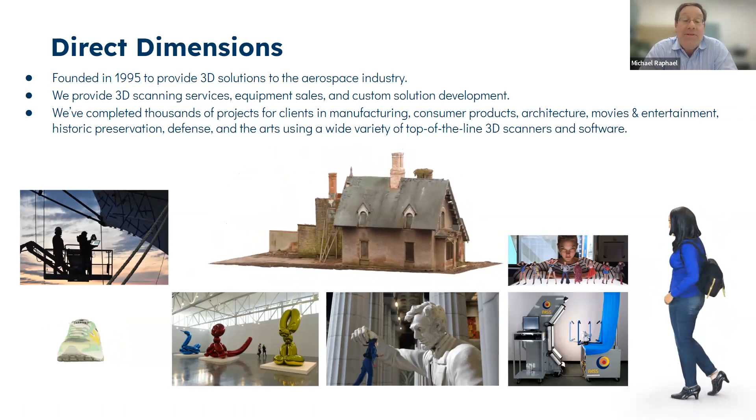As the photos and images rolling around show, we scan across a wide range of applications, from manufacturing and consumer products, to buildings, aircraft, ships and subs. We scan people, we do medical applications, and we push this technology to its limits in as many ways as we can. So if anybody, today or later, has any questions about scanning, I welcome you to reach out, and we're here to help with any understanding one would need.

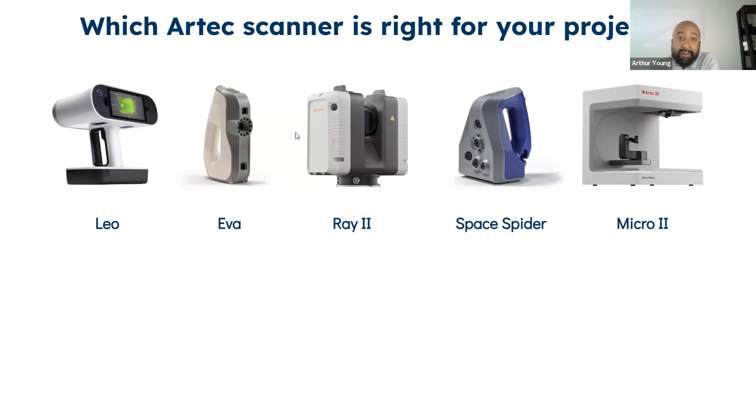So we'd like to just start, I mean most of you are familiar with, or you might have one of these scanners already, but let's talk about where this technology is. It's fantastic that you're using one of these scanners for scanning people, buildings, art objects, and it all feeds into the same pipeline, which means you can process the same data in Artec Studio 18 and moving forward. That's amazing with this technology.

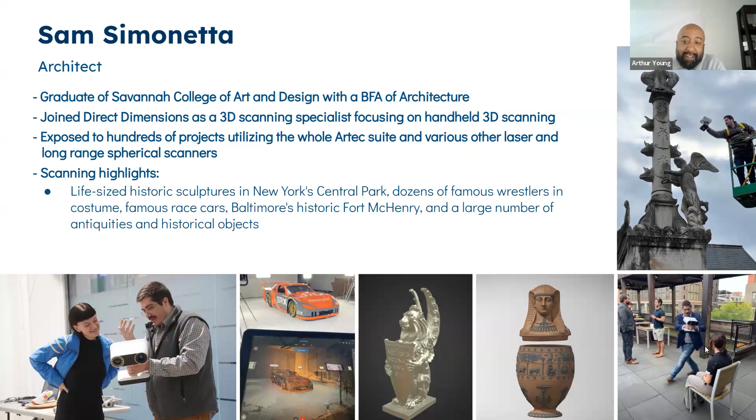We'd like to kick it off with an introduction to Sam, who's been scanning with the technology for quite some time. I don't think there's anywhere Sam hasn't been to scan objects, people, cars, you name it. So he's been using this technology in a wide range of different situations. If I ever have questions, I go to Sam, and 99% of the time he's got an answer. We're here as a resource for you, you can always reach out to Sam and myself to help with any Artec specific questions you may have. So Sam, I'm going to kick it over to you.

And these are some of the things that you can start to present on. So I'm going to stop sharing. Guys, I'm Sam, I'm going to be talking about mainly the user interface stuff that's new in Artec Studio 18, and Arthur's going to hit some other features.

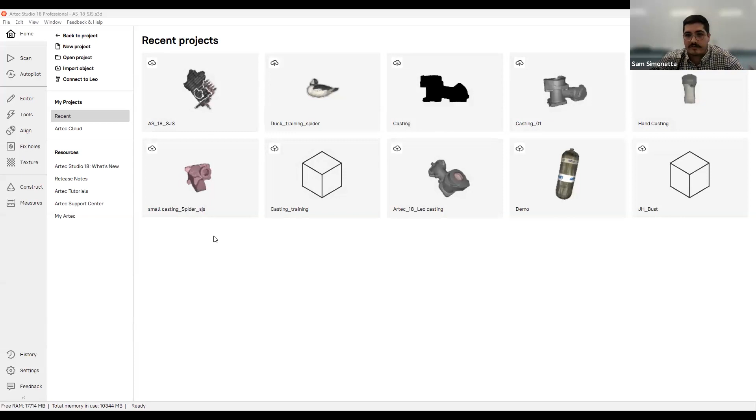So the first thing they changed in Artec Studio, right off the bat, is when you open Artec Studio it gives you this homepage, and if you look, it's a little different. The main thing is you can view recent projects based on images. So every time you save an Artec Studio 18 project, it gives you a screenshot of what's in that project, and that is displayed here. Depending on how you want to view this, you can view it by date modified, alphabetical, etc., or you can also view it in this view or by list, whatever your preference is.

The other cool thing in this homepage is you also have resources. So if you need to see the manual, or you want to see release notes, tutorials, etc., you can access all that in this resources tab, and it will directly link you to the website. Going forward, if you have a project open like I do, you can click back to project and it opens your project. If you ever need to go back to that home screen, you can click home and it'll bring you back to this page. So now you can toggle between both.

So in this case, I'm going to open my project that I already have done here. And I want to talk to you about some new features that are implemented in Artec Studio 18.

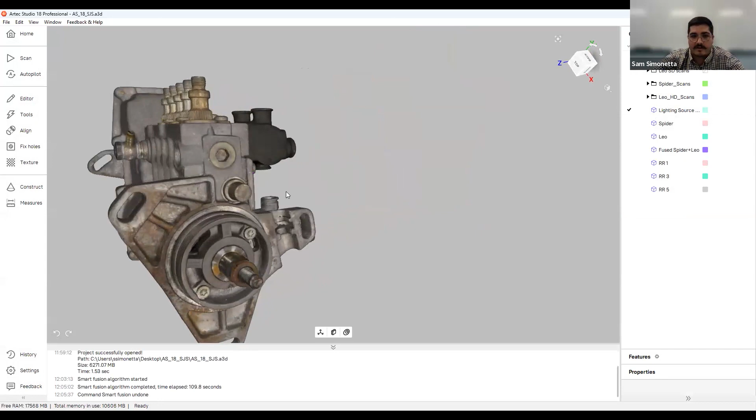One of the cool new ones is this lighting source control. I already have a finished model here, and you can see it's textured, has all this great color information, and I can actually turn on my lighting control. If I go down to this little box here and click lighting, I can show the directional lighting, and change this based on how I want to screenshot this. If I want to show people some realistic renders, something quick and easy without going through another software, I can adjust all these different conditions.

And it doesn't just apply to the colored model. So if I turn off texture and I turn on scan color, you can see now I can also adjust it in this view as well. So that's one of the cool things.

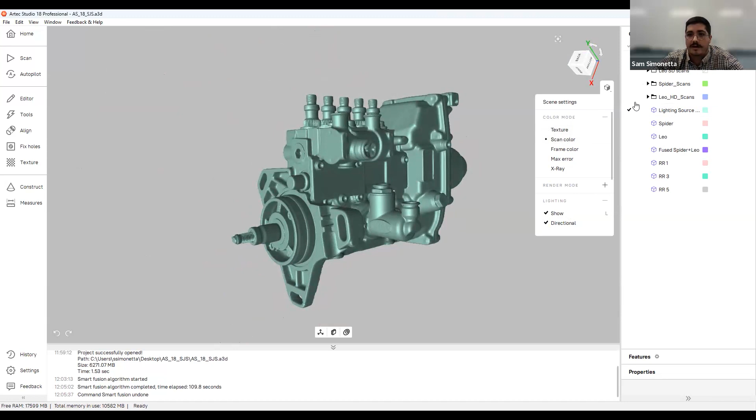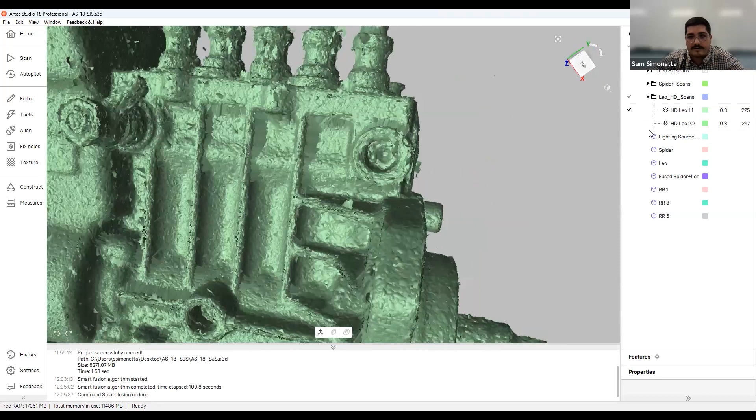Another really interesting feature that I use quite often now that I've been playing with Artec Studio 18 is this ability to select individual frames from a plethora of scans. So I have this scan open, it has 225 frames. In the past, if you had a misalignment or a frame that just didn't belong in there, you had to manually go in and search for it in the frame tab by going through individual frames. Whereas now, if you press Alt and click that individual frame, it isolates it, and then you can edit it, delete it, etc. And it gives you the number.

So if the misalignment or the thing you're looking for is in multiple different scans, you know the number and can gauge which one it is. So there's that. And this also applies in the eraser tab as well.

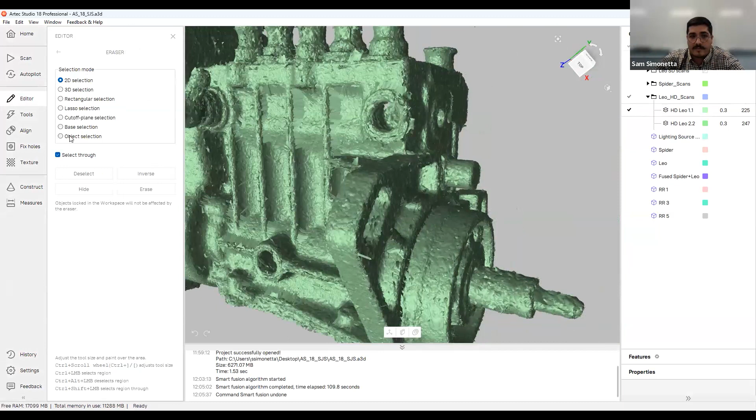So if you go to the eraser tab in the editor tab and do the same thing, the only difference is in the object selection mode in the eraser tab, instead of treating the frames as frames, it treats them as objects. So if I have my object selection on, I can easily just highlight that, and it highlights all the rest of the frame data within that frame. Whereas before you had to go in and manually do it.

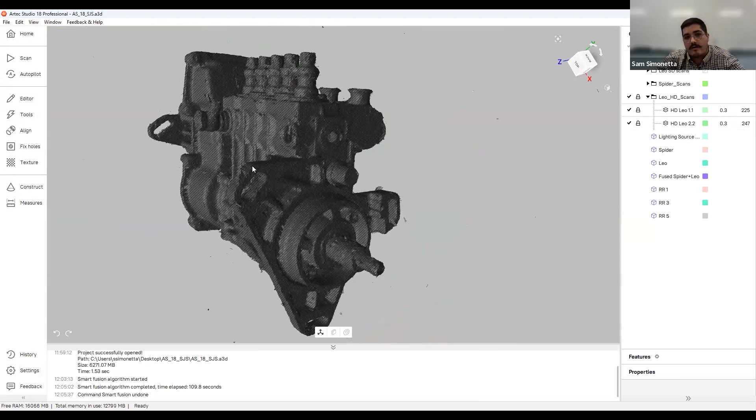One additional feature I'd like to talk about is the locking. In the past, you could lock frames, data sets, and objects, and it would be kind of hard to gauge what is locked and what isn't, especially if you had a lot of things within the project and different locked folders. So now when you lock something, it turns this really cool gray stripe pattern, which you can kind of visualize.

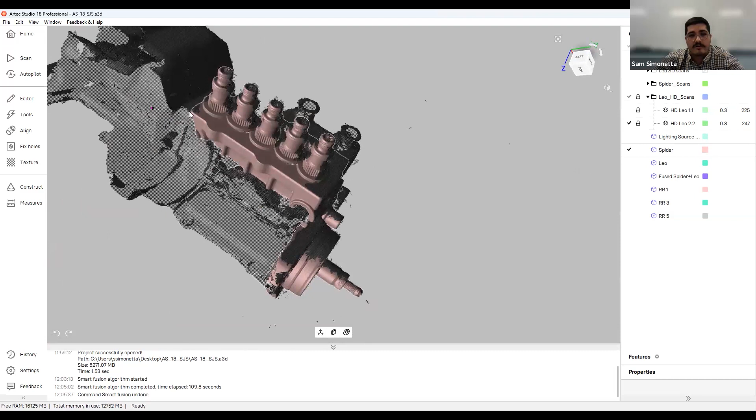So if I turn on anything else, you can notice that whatever is locked is gray and everything else is the scan color presented in the little boxes over here, which is quite useful. And this actually makes it immune to the eraser tab. So if I go back to the eraser tab and click anything I want to erase in this mesh, it will only erase what's highlighted and not what's locked. So if I erase that, it doesn't erase all the other selection, which is quite useful.

One other thing that's kind of interesting in the UI is the ability to do frame decimation. So say I'm scanning with the Leo or the Spider, and I might be new to scanning or I might be advanced, I might have over-captured something, or I have a huge part and want to reduce the file size. What Artec has introduced is this frame decimation, and basically that allows you to reduce the number of redundant frames.

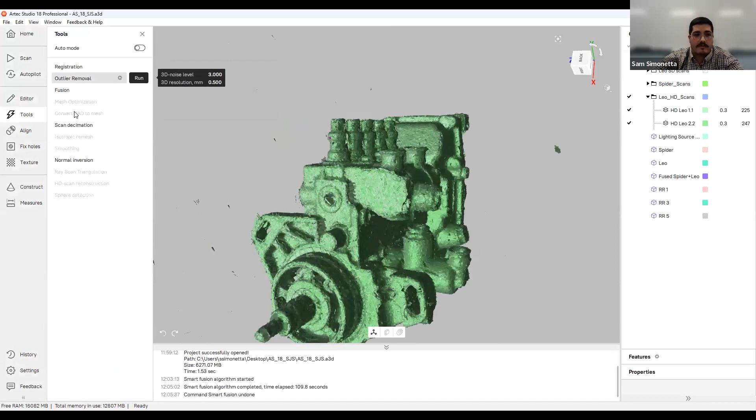So in the tools tab, there's a button that says scan decimation, and you can basically give it a decimation percentage. They say start at 40% is ideal, and then you can go down from there. What that's going to do is go through all those frames, all 200 or 500 frames here, and reduce those to 40% based on how much overlap is presented in the actual model. So this reduces the file size, and it just makes it easier for processing because there's no redundant frames.

And then since we're over here, the registration tab - you can see that things have been kind of pushed together here. So before, you had all these different things, but now it's all in one little menu.

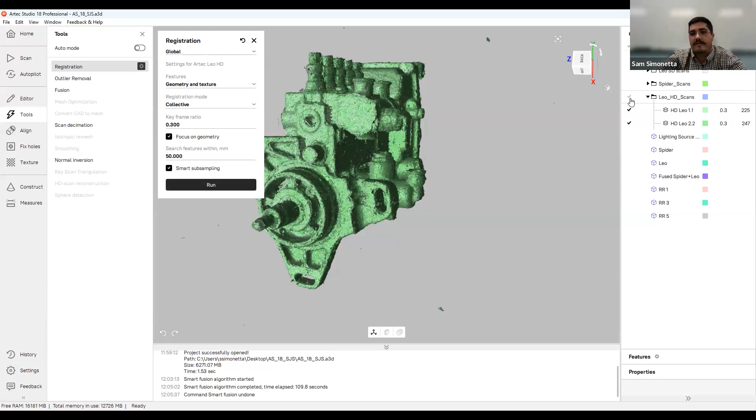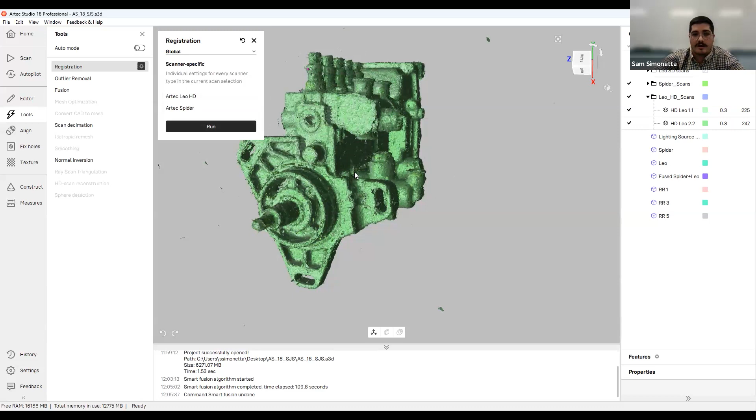Now you actually have the ability to do the registration with different scanners. So instead of doing them all individually and hoping they go back together, or running the registration multiple times, you can turn on the Spider and the Leo scans, and it gives you scanner-specific individual settings for every scanner based on the current scan selection, and you can change these settings for each one. So I could say these are my Leo settings, and these are my Spider settings, and I can run them simultaneously instead of doing it twice or three times. That just reduces time, etc.

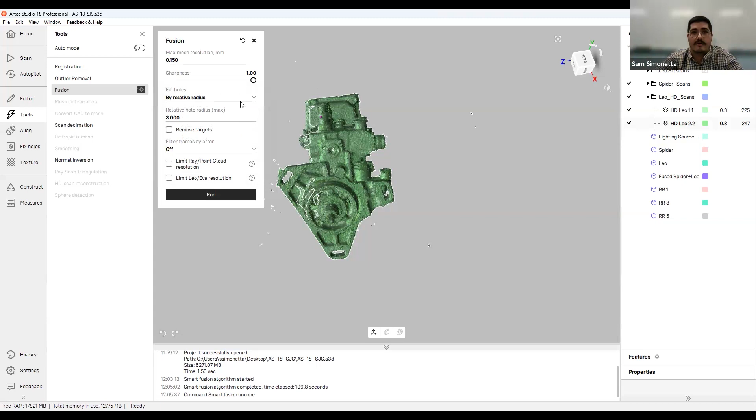And they also introduced this new hole filling method. So if you have 2 different types of scanners, like Spider and Leo, or Spider Eva, Leo Eva, Leo Spider, you can turn on 'by relative radius.' What that's going to do is take both sets of scan data, and because each one is being meshed at a different resolution, the hole filling is slightly different. So at 0.15, the triangle sizes might be smaller versus at 0.35 or 0.5, which is larger. This runs an algorithm where it merges those two together, so it knows the types of scanners and hole fills smartly and accordingly.

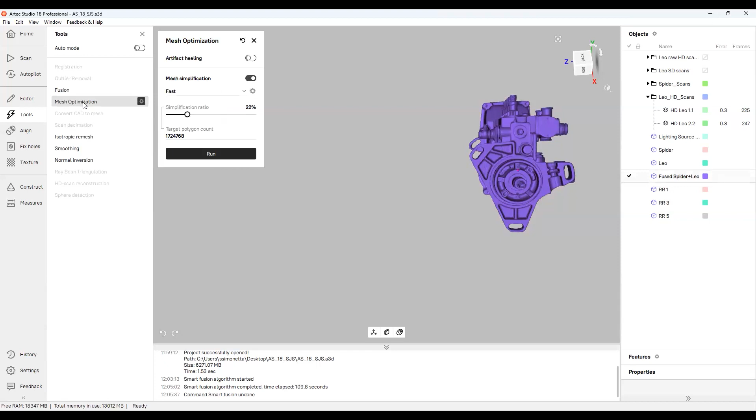So you can see that it optimizes the hole filling based on two different types of scanners. And then within this tab, let me turn off one of these - you have the mesh optimization tool, which is similar to the post-processing tools that used to be here, but now it's called mesh optimization. They introduced this Artec, or artifact, healing. If you click that, you have the ability to remove small objects like before, based on the object size or triangle size, whatever is easier for you.

And then the newest thing they introduced was this heal bad polygons. If you select that, you have the ability to verify and correct problematic polygons - non-manifold edges, dangling edges, crossing, folded, overhang, etc. And then you can also fix holes in here as well.

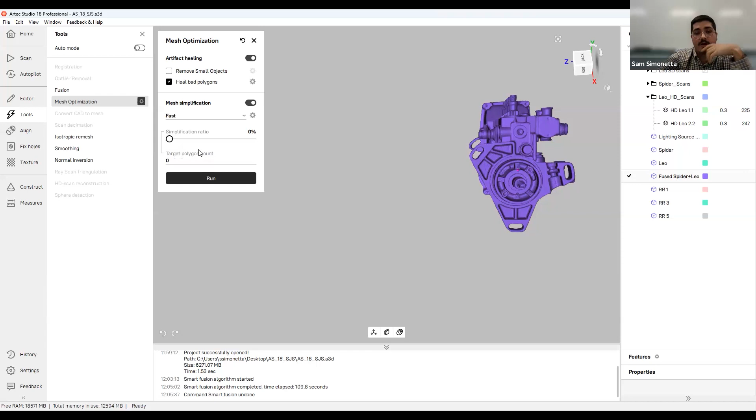On top of that, you have your mesh simplification, which is also in this folder. So if you're doing decimation to any level, you can do it either fast or regular, but they did introduce this slider - if you want to target a specific polygon count, you could type in 2 million, and it will adjust according to that, or you can use the slider.

In terms of exporting data, this is something that's a little different in Artec Studio 18. You can do it the traditional way by going File, Export, and whatever is selected can get exported. But now you also have the ability to right-click on the mesh and press Export, and then export it to Design X, Control X, etc., or just in general.

And while we're over here, if I click properties - let me move some things around so I can see it - properties of our objects will give me the basics: polygon size, the rough estimate of the file size of this export, the resolution, and the source scans and the scanners they came from.

So in this case, it came from two scans from two different scanners. If you highlight over here, you can see that it came out of the Spider and the Leo, and vice versa. There's two scans, Spider and Leo.

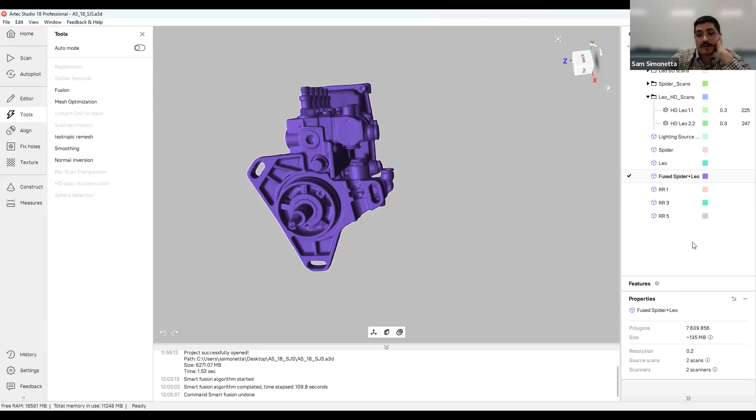So if this is for the mesh, and if I click on the actual scan itself, if I unclick this and click on the Spider scan, you can see I have a basic and an advanced tab. In the basic tab, you just get the global registration, the frames, how many frames there are, texture frames, max error, scanner, and scan date and time. In the advanced tab, it gives you a bit more information about tracking mode, factory calibration, and the scanner ID. Those are all very useful. If you forget you've done a specific step, you can always go back and verify based on what it says, like global registration's done, it had this amount of frames, etc.

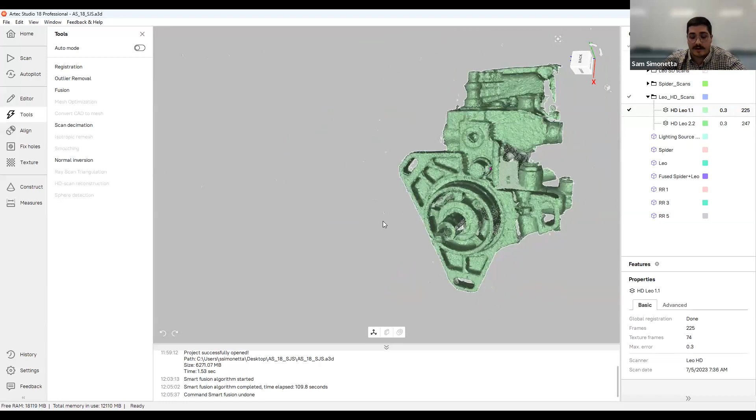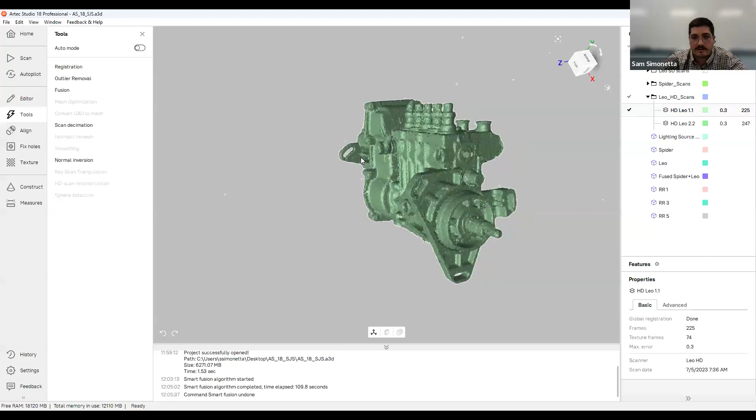So one of the last things I'm going to hit on is the HD reconstruction. In order to do HD reconstruction in Artec Studio 18, you have to run a neural network AI process. That will run in the background for a bit, and then it will optimize your computer to run the HD reconstruction if you're using the Leo. This is only for NVIDIA cards, and it's GPU based, so testing is mandatory.

And then the final thing I want to hit on is that with the introduction of the Ray 2, you can now import Ray 2 data. You can import that file by pressing import and then Ray 2 scans, just like you would import a Leo project or photos, etc. So that's all I have with the UI, and now it's off to Arthur.

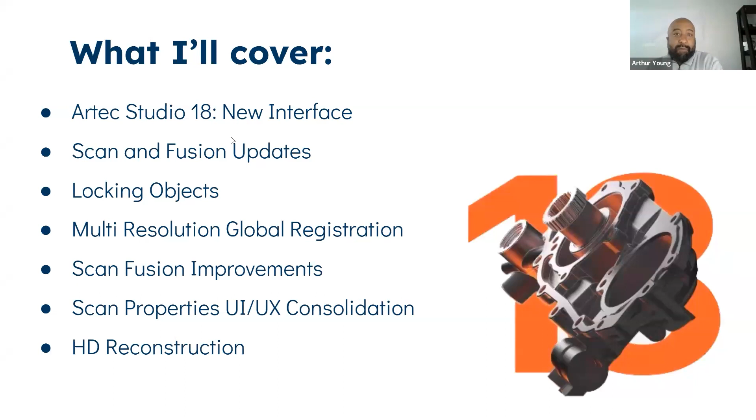So I'm going to cover another portion and give a quick update here. Sam just covered these different areas and options within the software. A little bit about Arthur is who I am - my background is industrial design, product design engineering, and this is just a quick snapshot of different projects that I've worked on. In many respects, we've used 3D scanning as part of the process.

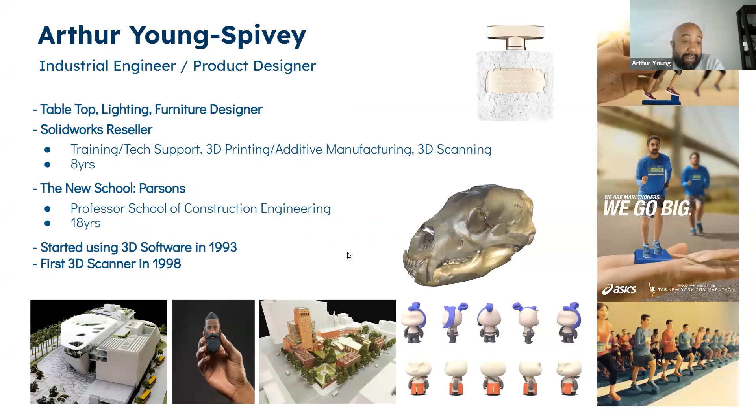So some of the areas I'll begin to cover, what's new inside of Artec Studio 18, have a lot to do with enhancements in areas, taking a look at some new toolbars that were added and things of this nature. So I'm going to actually pull up Artec Studio 18.

As Sam mentioned, we could see that the UI, the UX has now been changed. So all of the recent projects are now showing. I'm going to open up this project called 'all what new'.

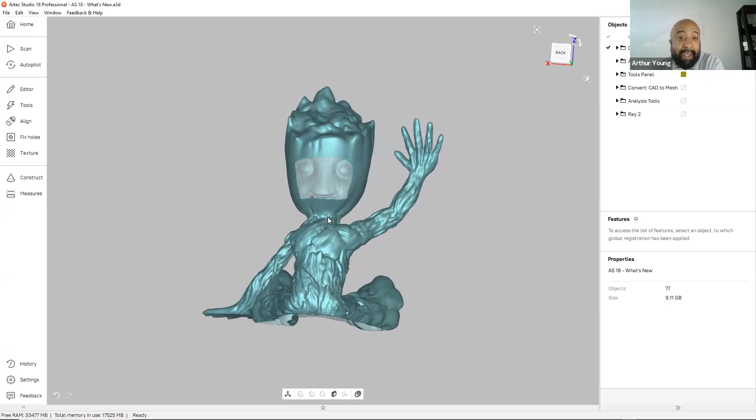One of the new aspects that have been added is within the defeature aspect. Most of you might be familiar with Groot from the Marvel superheroes movie set, and back here we just have this huge kind of hole sitting in the back, right? If you haven't tried the defeature brush, it's located here in the editor's toolbar amongst the transform, rotate, positioning, smooth, and eraser brush, but definitely the defeature brush is here.

So this is an algorithm that within the hole filling, we used to get this option. If I want to fill this hole, I could go ahead and use flat or smooth. So what they did is they basically carried over this algorithm of filling the hole smoothly, and carried this into the defeature brush essentially.

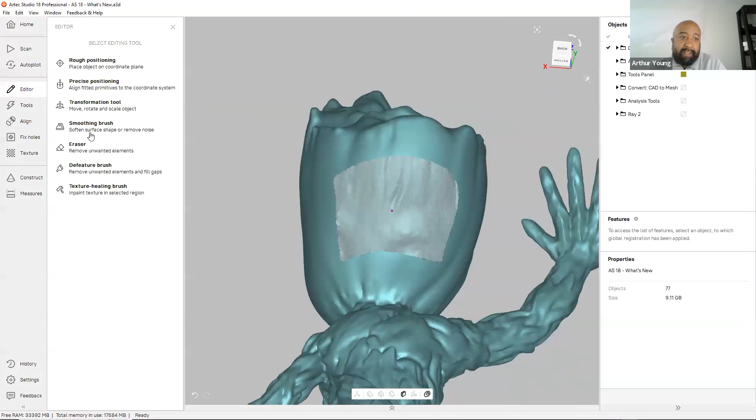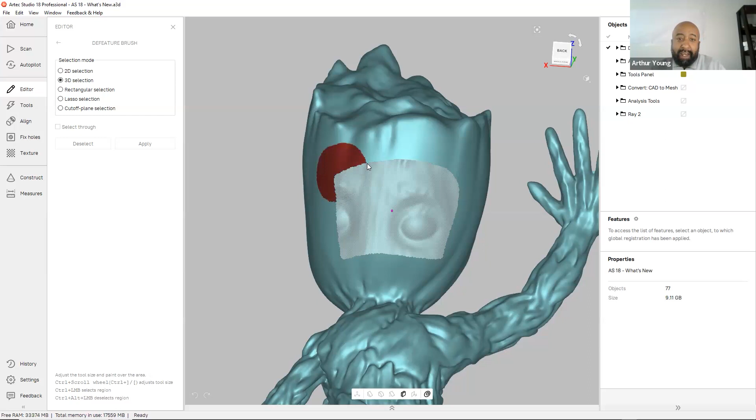So I'm going to turn off this option over here - maybe some of you might have noticed this, maybe not. It says 'select through'. When I do that, it allows that when I'm holding control on the keyboard and using the middle mouse wheel, the brush size is changing by holding that middle mouse wheel. I'm just going to highlight while holding control on the keyboard to basically grab that edge. Because I don't have select through turned on, it doesn't grab the other side of the face. Then when we click on apply, it's basically going to fill in this hole nice and neat.

Right, so that's a great addition to have that curvature continuity filled in for that hole algorithm in general. This is a new option that's been added specifically for the defeature brush.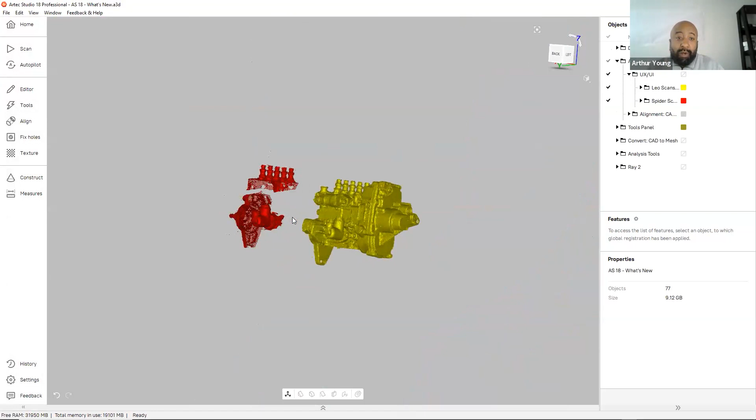Taking a look at the next step, alignment. For the UI and UX, one thing that's definitely changed is the colors on screen. When going into the Align tab, you can see the blue and red, yellow and red colors reflected as part of the individual scans, and the folders for those. But when we go to the Align tab, previously the two base colors were blue and green. Now, moving forward, the colors are gray and blue. So when it's registered, as we've known before, it could be that blue color.

You can double click, as most of you know, or right mouse button click to mark it unregistered. If we go now to the not registered scans, this used to be green in color, so they changed it to gray, but that's still free to move around. Nothing has changed in that aspect as a whole.

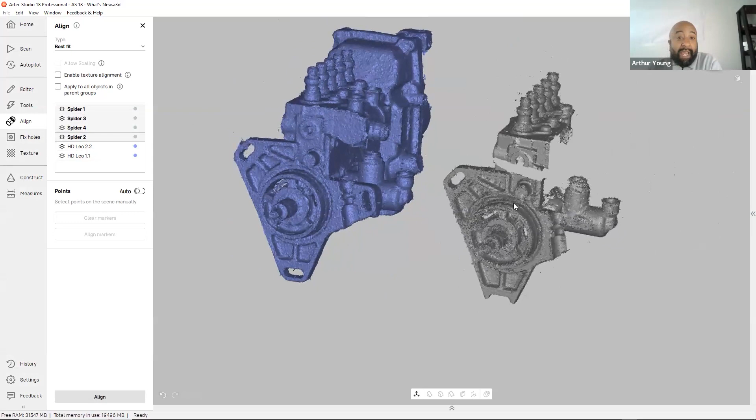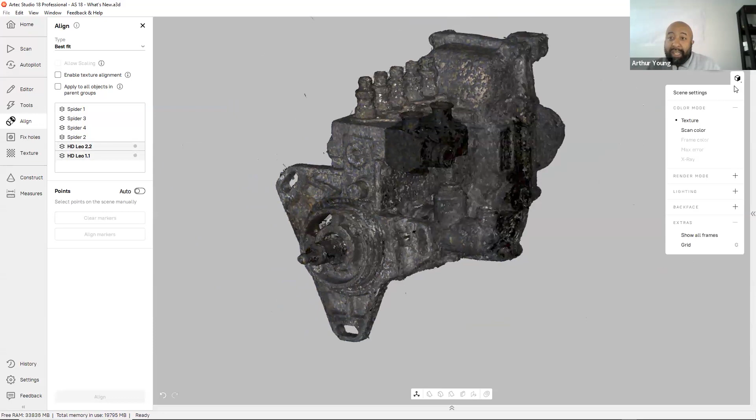They've also added the ability to show the scan and texture colors. So if you've scanned with your Spider, Eva, or Leo, and you have color or textures on the model, that can now be shown on the screen. If I double click, you can see the scan colors are now being shown, or you can drop this down and show the scan colors, not the textures. It's totally your choice. Again, that's just a UI enhancement, changing it from the green color previously to this gray color. Not a huge deal, but it's definitely helped for recognition of what's happening within the environment.

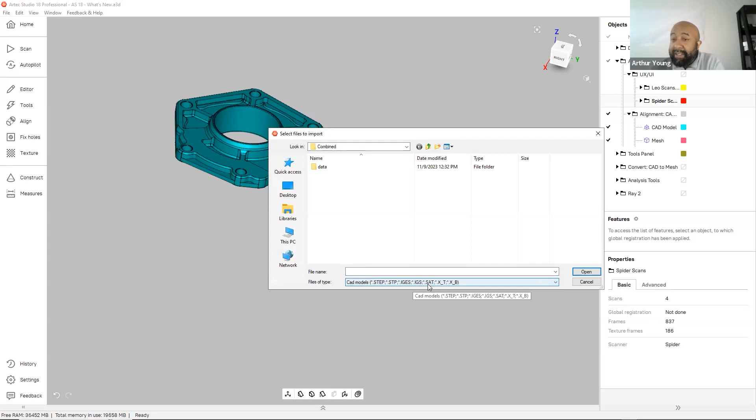But trying to align mesh data, which is what this data is right here, to CAD previously was not possible. So we can have the CAD model fixed, we have the mesh data, and we can just click on Align. One thing you'll notice is there used to be a green bar down at the bottom to show the progress, but now here in the middle there's an Align tab, and the progress bar grows as it begins to align the mesh. You could also do the method where you add points - either methodology works, whichever is easiest for you.

But once that data is aligned, mesh to CAD data is really a huge deal. This allows you to do a whole host of inspection analysis, deviation analysis, and cross-section analysis between the two data sets. So it's no longer that you have to convert the mesh to CAD or the CAD to a mesh and go from there. So there, the two geometries are aligned to each other.

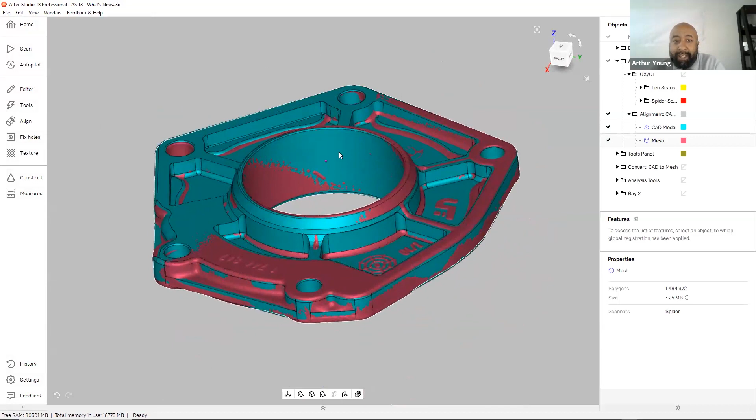Just a little tip - if you're rotating on the screen and it's rotating not on center, as Sam mentioned before, it's worth revisiting: double click and it gives that little sphere, which is the center point on the screen from which you're rotating. If you want to deselect that, just double click anywhere on the screen and that comes back.

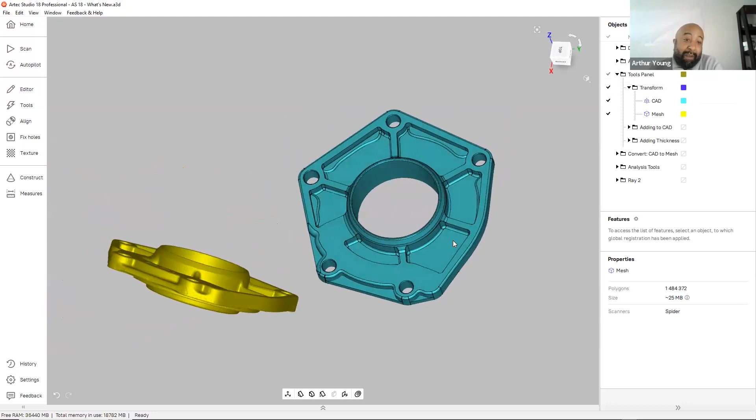Moving on to the next aspect added for Artec Studio 18, within the tools panel - this is a huge deal for me. Whereas we normally would have to go to the tools panel, under Editor, Tools, Transform, to get the move, rotate, and scale tools, now in Artec 18 we have this little panel down here which gives us the option to move, transform, and rotate. Now here's a little trick - the same way Sam showed earlier how you can lock an object, because if we do the rotate, move, or transform options, it's going to move both at the same time, and that's not what we're looking for.

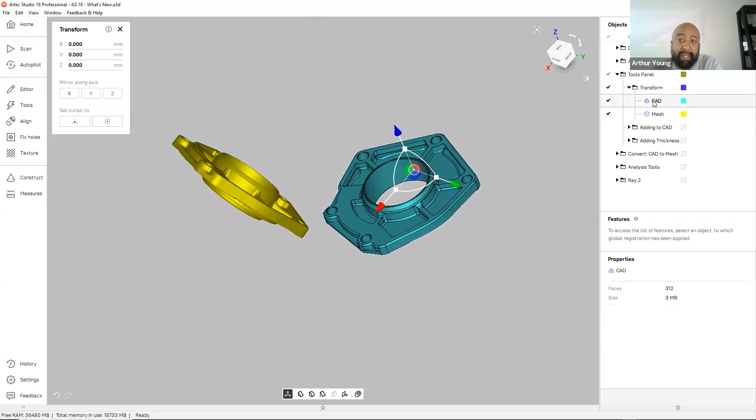So we could go to this object, the CAD, and say lock object. As Sam mentioned, it goes to this stripy gray kind of color here. So if we want to now move this, you'll see that it's only going to move just what's in yellow.

We can set the cursor to the geometric center, but it doesn't go to the center of the yellow because we're showing both data sets at the same time. So if I just quickly hide that and bring it back, you'll see that it now goes to the center of the yellow, and we can really try to get this in position and translate and rotate this around as we need it to be. That's a nice little update here in the tools pop-up menu at the bottom.

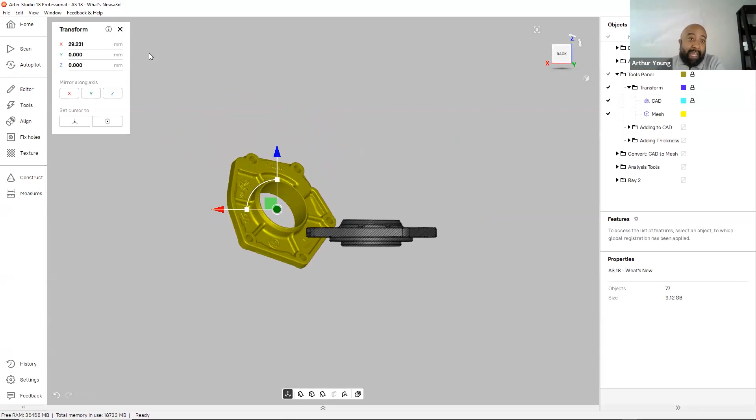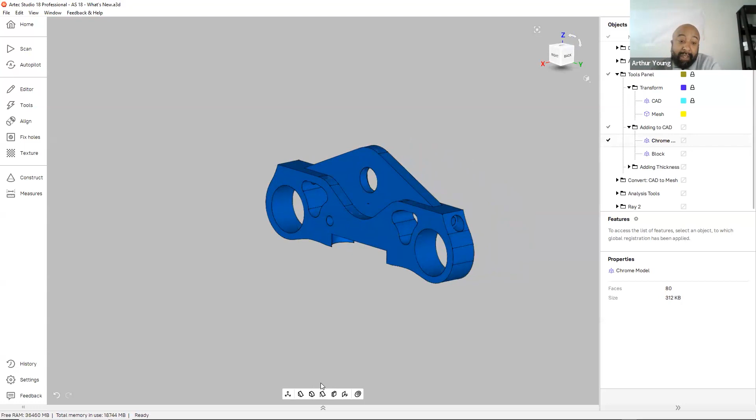Along with that, we have some other options for adding certain types of features to imported CAD data. We have chamfers, fillets, and draft angles as three options to add to a CAD file. So very easily we could say we want to add a distance chamfer that's symmetric.

We can pick this edge and it gives a highlight. If we need to change the actual value, there's a nice highlight showing this chamfer running along this tangent propagation. When modeling in CAD software, this arc is tangent to this line, tangent to this edge. So this tangent propagation allows it to either, if I turn that off, only go along this edge, or when you turn it on, it runs along the whole edge.

So when you apply, you can see that chamfered edge is applied to the geometry. Again, this is an imported CAD file as a step, IGES, or Parasolid file format.

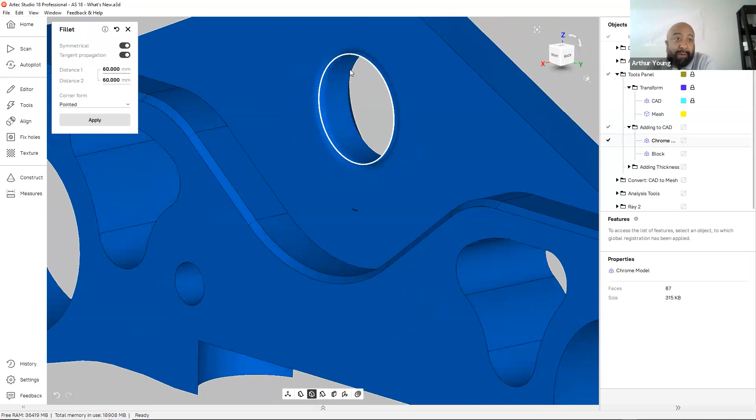Along with that, we also have the fillet. Being able to just grab an edge, and again seeing a preview of the values, we could make this 30, or 60, whatever value you'd like. And it's always giving you a nice little preview. Click apply, and that's onto the geometry.

So they're just adding more functionality within the software that allows you to add some things without having to export it back out to make these changes. If you don't like the change, there's this little undo, basically Control Z here in the box, and that will just take it back as if it didn't happen.

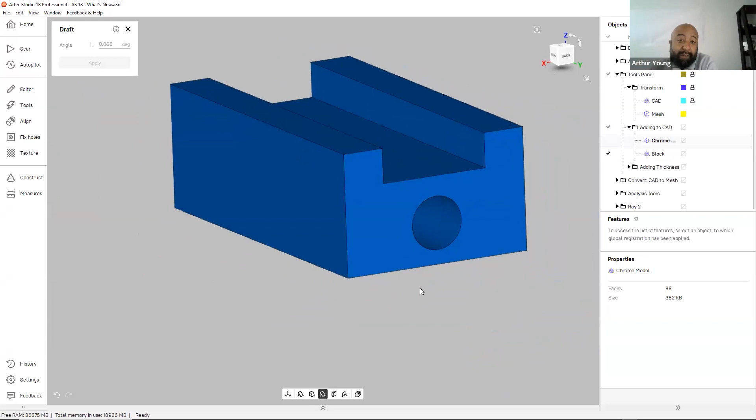Adding a draft. This is a pretty simple block, but just to communicate what we're trying to say: when you're adding a draft, like when using injection molding, your side walls can't be 90 degrees. They have to have some type of taper, some type of draft angle to them. The first face that is selected is your zero datum from which it's parting out and creating the angle.

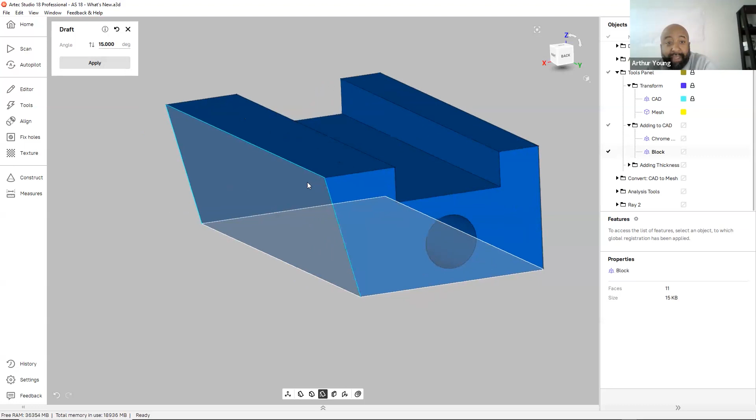So we could say this face is what we're adding to. Just to be dramatic, we're going to add a 15 degree draft. Normally it's maybe 3 degrees at most, but it's showing you a preview of that 15-degree angle from this side. So we can click apply, and the dialog box is still open.

So if you wanted to click on this face and then add a draft to this face, you can add a different draft value, and you can also put in a negative value. So if I say -20, it's going to go in the opposite direction. You can click apply, okay, and it applies that information.

Again, just allowing you to do some base CAD features and functionality here in the software is essentially what they've added into the software. So again, this is CAD features.

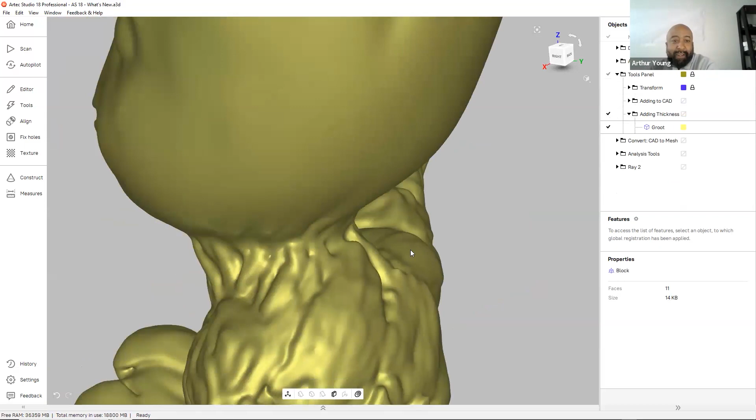Next option, adding thickness. I like to go back to this guy because he's one of my favorite characters in the movie. What we're thinking about is using this for 3D printing, specifically SLS 3D or any powder-based printing. One of the most important aspects of that is that this is just a hollow model, right? It has no wall thickness, but especially as you want to leave a uniform wall thickness to the model so that the powder can be excavated in post processing.

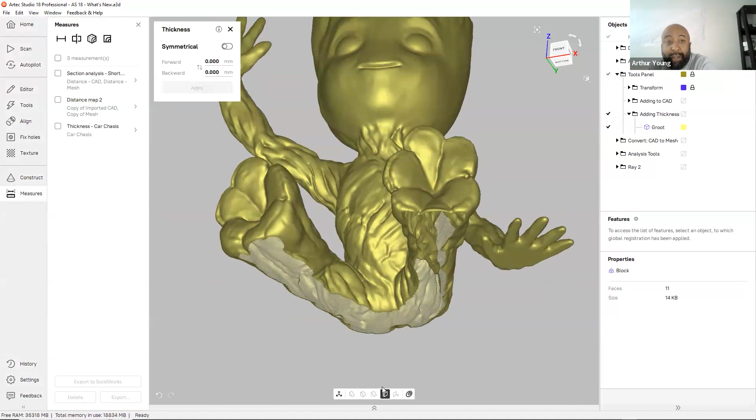So here under the construct the measures tab, or down here in the toolbar, we have a thickness option. If we click on that, it's asking us whether we want to add this wall thickness to the inside or outside of the geometry.

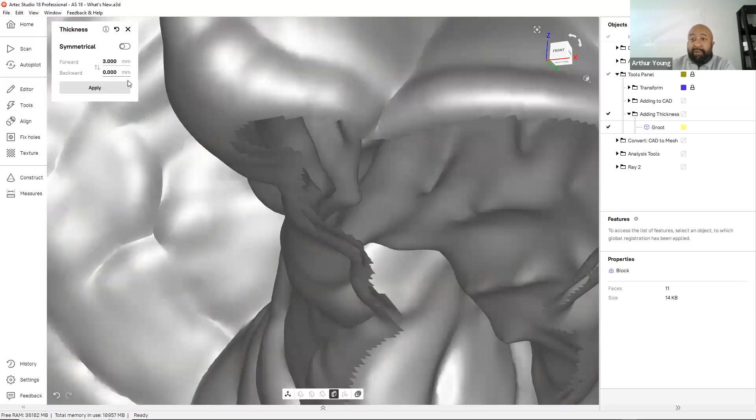So if we put in 3 millimeters, it gives you a preview, showing the geometry going inwards, or you can reverse it to go outwards. It's your choice depending on what you need. So we click on that, click apply, and now it's offsetting uniformly that 3 millimeters, and then it's going to cap it. So this is a watertight 100% model that's ready for 3D printing right here from the software.

If you wanted to really double check this, you can add a section view that's going right through the model. This is a nice addition in Artec Studio 18: even after you have a plane, it's dynamic, so you can slide all the way through the model. You can see it already has that uniform wall thickness all the way around, which is great especially if a lot of you are doing 3D printing.

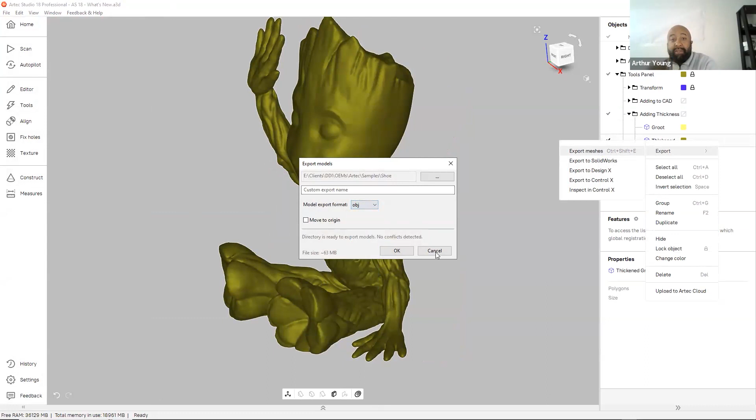So you can export this out as Sam showed earlier. You can export this mesh as an STL file, OBJ, or PLY, and that can go right to whatever type of 3D printing you're going to do from there. This is a nice addition that's been added, and when I added that thickness, it kept the original, so you could have multiple versions at different wall thicknesses if necessary.

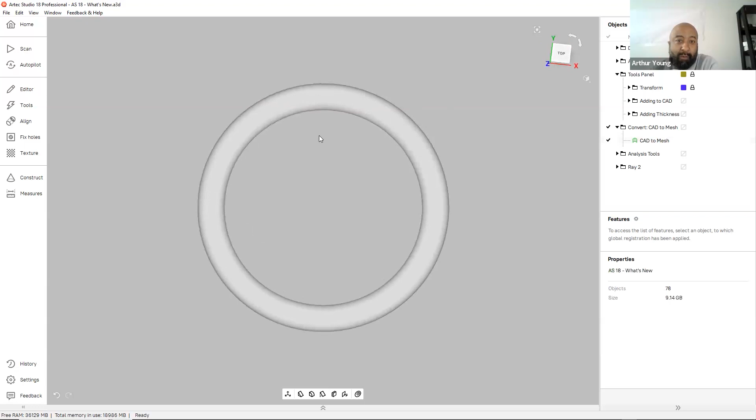All right, converting to CAD, or rather converting a CAD to a mesh. This is an interesting aspect where if you want to use the CAD geometry for Boolean operations inside of Artec Studio, we have this CAD file that's been imported. Part of the reason I wanted to show this in simplified form is because when you're using this algorithm, it's converting it back from a BREP CAD data to mesh, so triangles or quads.

The accuracy is really going to make a difference here. I'm going to turn this down to 10 so you can really see what we're looking at. When it converts from the CAD file to the mesh at 10, it's a really low resolution, and that's generally not going to be desirable. The accuracy setting determines how well the mesh is going to trace over this existing CAD geometry. So if we say an accuracy of 70, that's more than likely going to be enough to trace over that existing geometry.

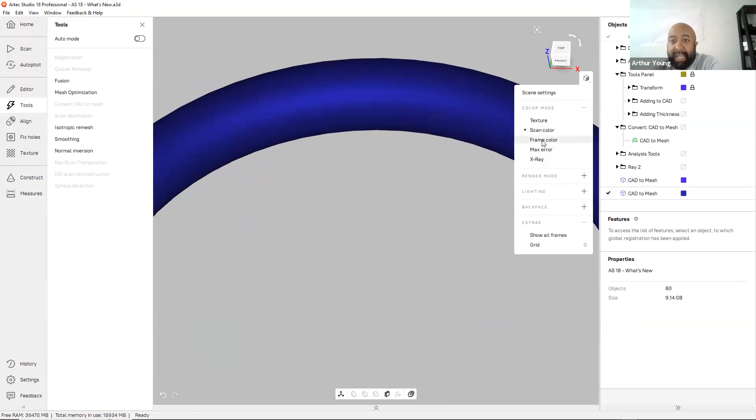You can also change the view from scan color to X-ray. X-ray was probably one of my favorites - if you haven't tried it, give it a try. You can bring up the brightness and kind of see through the object, so to speak. You can also switch it to wireframe, point cloud, wire over solid, or points over solid. So there are different ways you can render on screen while in X-ray mode, or even scan color.

And again, if we had another operation, we could come down here - if you guys haven't tried this, under the edit menu there's a Boolean operation. So you can add, union, subtract, or intersect any two mesh geometries inside of Artec Studio.

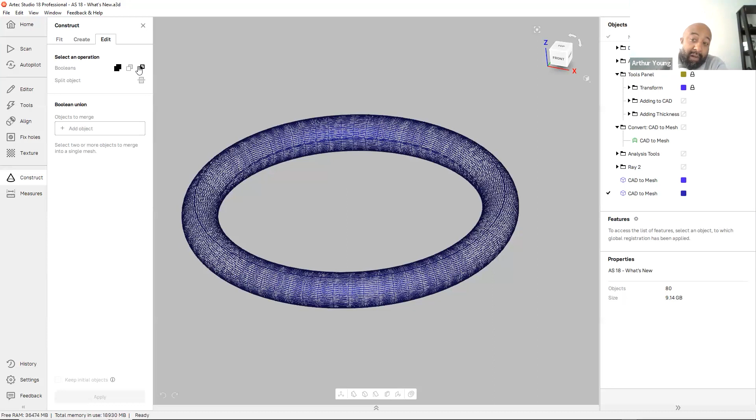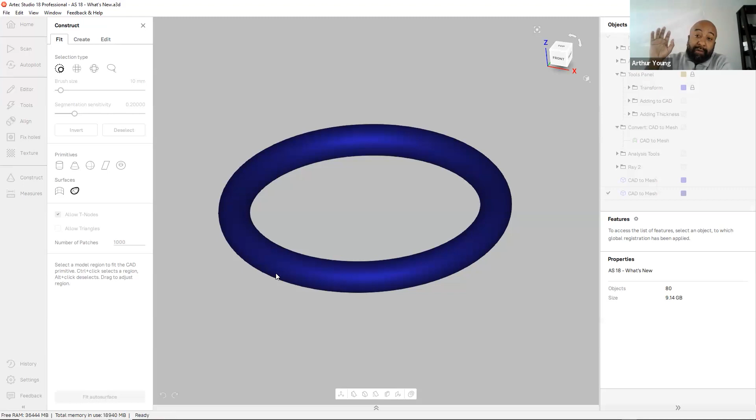Something some of you might have missed that was added in version 17 is the ability to take a mesh - if you need to go to CAD software, bringing a mesh into CAD software can definitely be challenging. So here you have this option called auto surfacing. We could try at 1,000 patches to trace over this geometry, and it will do that. When it's done, you can export out from Artec Studio as an actual CAD file. 1,000 is definitely not enough, but this just illustrates that from here, when we do the export, we can export this to our CAD software, or just export the model as a CAD object - a STEP, IGES, or Parasolid XT file format.

Okay, so that was just briefly viewing the fill feature brush, where I filled in that hole. We have the alignment aspect, where we'll be able to move things around, things change color from green to blue. We have some new tool panels down here in the UI.

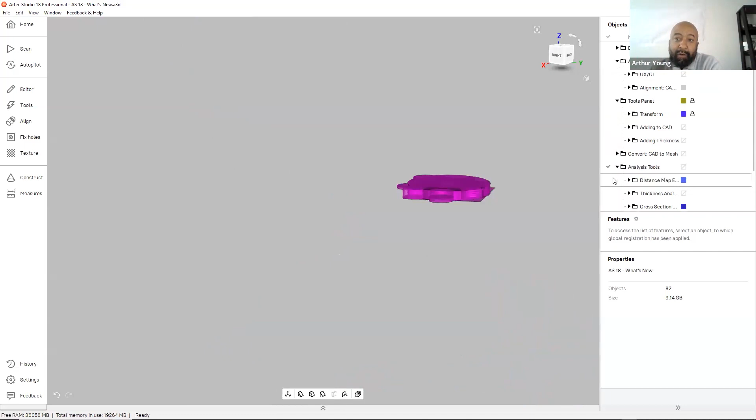And now getting into the analysis aspect here - first things first, distance analysis that we'll take a look at. So we have these two CAD objects that were overlaid on top of each other.

Under the measure tab, we have the option to do a distance map. This compares how much deviation there is between the CAD model that was first designed and the machined or 3D printed model, however it was actually manufactured. You can overlay the two data sets and calculate either by shortest distance or along normals. So from a distance map at 1 millimeter, you could see how well your process quality inspection is holding to your existing data. If you've made this one time or 10,000 times, you'd like to know that the 10,000th one is as good or close to the first one off the production line.

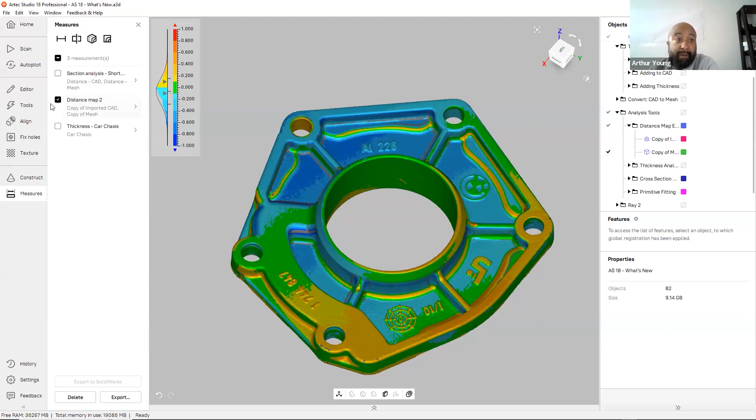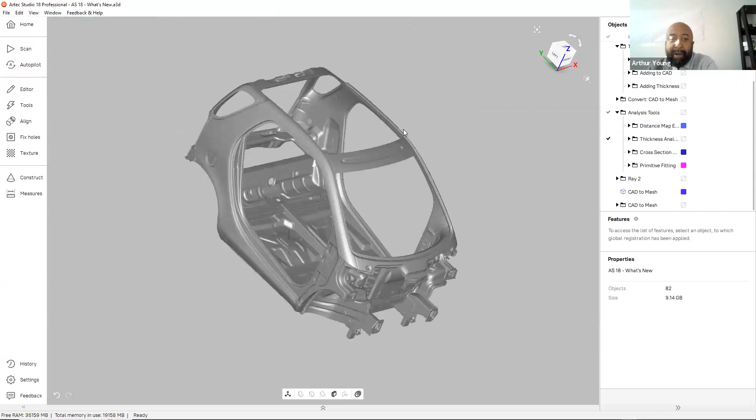Continuing with thickness analysis. This is mesh data, not a CAD file. If you're not sure, click the little box here and it fits it to screen. When doing a thickness analysis, still under the measure tool, we can do section analysis and distance map. That same distance map option is under thickness, where we can calculate and check for uniform wall thickness across the board. Click on 1 millimeter, then calculate, and it runs through the entire model, highlighting within the specification. We can also show min-max values called out on the model, looking at the range we've specified. You can bring the scale down to really examine the thickness of the geometry, and you can save this as a map.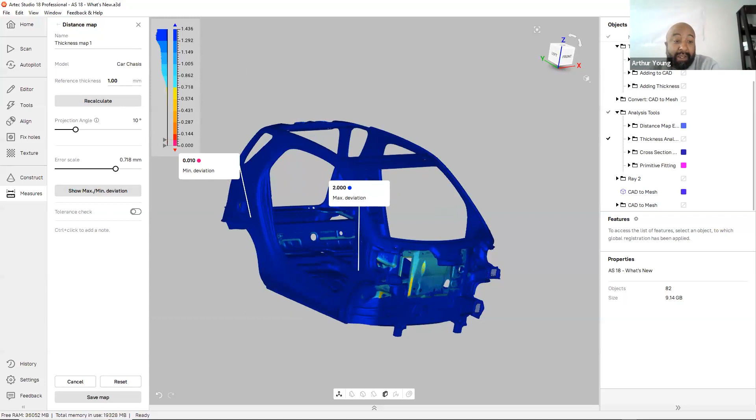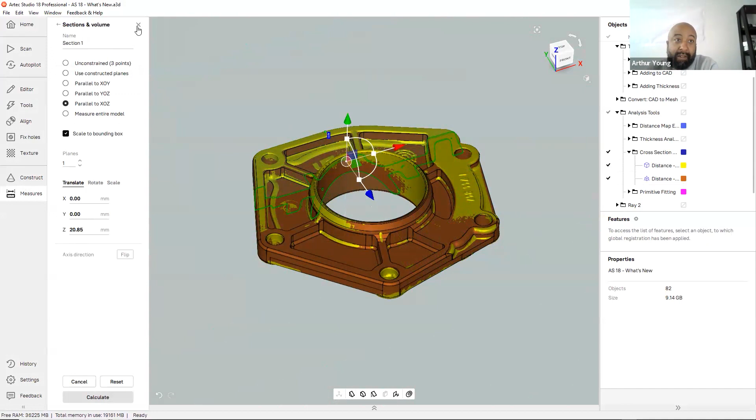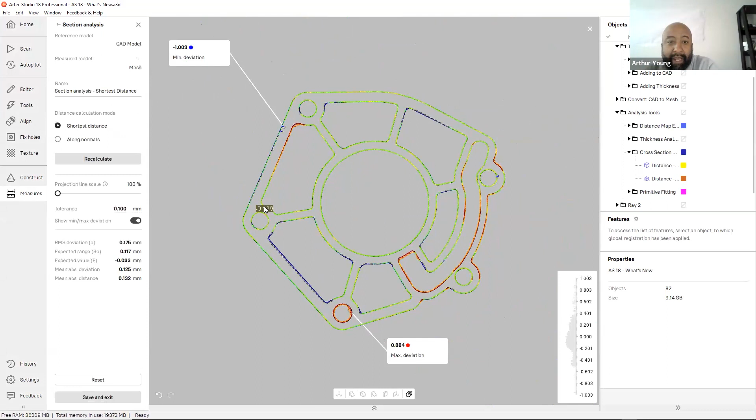Still in the analysis aspect, now talking about cross sections. Leading back to aligning mesh and CAD data to each other, we'd like to see a cross section. Under measure, under sections and volume, we can cut a cross section anywhere through both geometries at the same time. You can change the plane dynamically using the triad, anywhere you want, or create your own plane where you want it specifically. We can hide the two meshes and see the two cross sections of the geometries, with min and max deviation. If you need to recalculate, you can adjust your tolerances. The curvature combs show the deviation between the two, and can be enhanced or lengthened so you can see exactly how far off, with a call-out wherever your mouse is. Similar to the distance map, with cross sections you can also do shortest distance or along normals, depending on the information you need.

All right, so we'll exit back out.

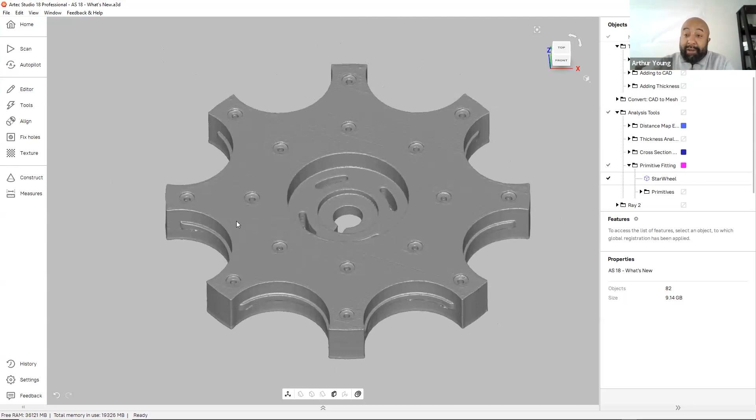Last but not least in terms of analysis is the fitting of primitives. If you need to take your geometry and start doing reverse engineering, Artec has really been focusing on enhancing and getting closer to true reverse engineering capability. Scan data is representative, but we need this to actually become true arcs, true lines, things of that nature. Going to the construct tab, we fit the type of geometry we'd like to this mesh, and how it fits to that geometry has been enhanced. Previously in the advanced tab we had robust, exact, and expanding, those three were already in the software. Two new options address how this will trace the data set geometries. Looking at this in wireframe and zooming in closely, when using polygons with this method to fit, it looks at the center point of each polygon versus vertices, where it looks at each vertex point.

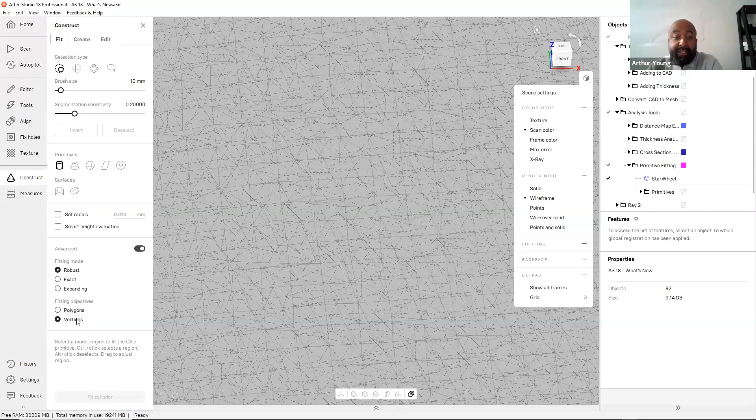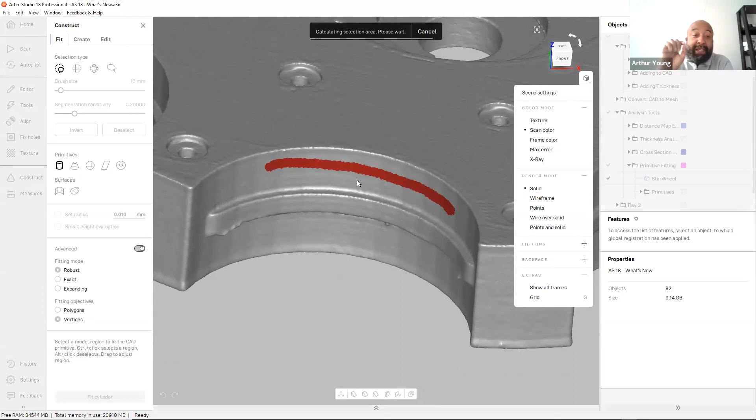Depending on what and how you want this geometry to fit, just hold control on the keyboard and mouse over, and I'm leaving this in vertices mode. Technically speaking, for the most part, vertices is going to be a little bit more accurate, but it's very dependent on how much you have selected when fitting this cylinder to that existing geometry.

You always give it a once over, kind of look at it and see, well, how well is this actually tracing the data that we're looking for?

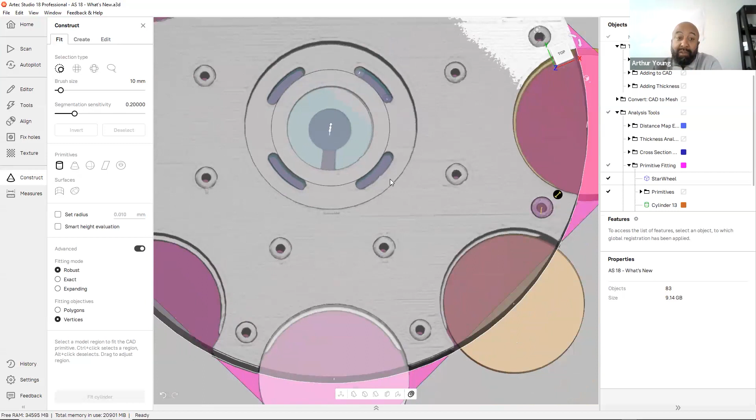The great thing about these primitives we're adding in Artec Studio is that they can also be exported out as CAD objects so you can reference this information in your CAD software. So if I went through and used that as a leverage point, I've set this whole model up with planes and cylinders in different parts of the model to be used as reference points to help truly reverse engineer this whole model back into a CAD file.

It's kind of the same thing with the planes. If we highlight this model, one of the things it knows is if it grabs too much - in this case it's not - but you can always adjust the segmentation sensitivity, bring that slider up or down, and it will adjust how much it actually uses when fitting that plane to what's selected.

I'm trying to keep up, but let me know if there's any questions in the chat, guys.

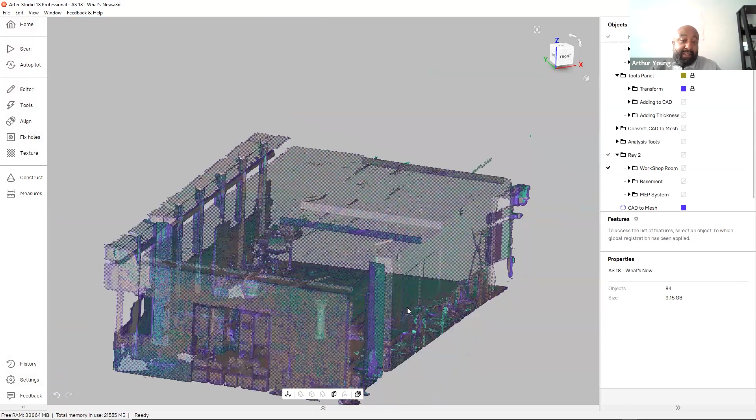So we have primitive fitting that we've just reviewed. Last but not least, something really brand new that we love a lot is the Ray 2 3D scanner. This is for scanning large rooms, buildings, things of this nature - things that would take you a really long time to do with a handheld unit.

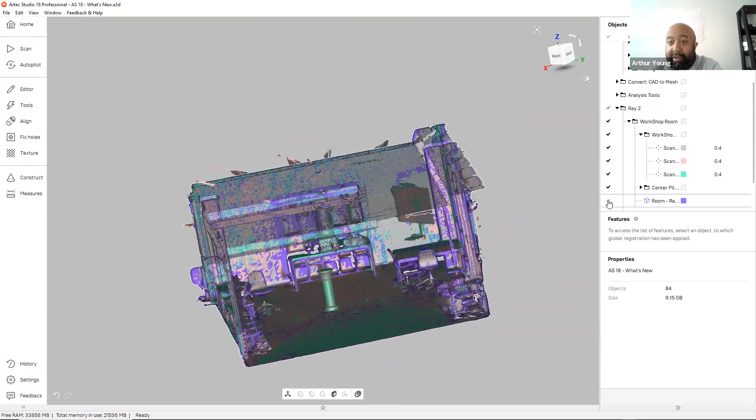The Ray is a terrestrial tripod-based system. Scanning this entire room happened pretty much in one go. You can see this workshop has point clouds. Technically speaking, there's actually 3 scans, right?

You can see the scanner was here in this location - I can tell because the scanner can't see under itself, that's why it's a perfect circle, so to speak. Then it was moved over here to capture this angle, and then the last one was on the other side over here.

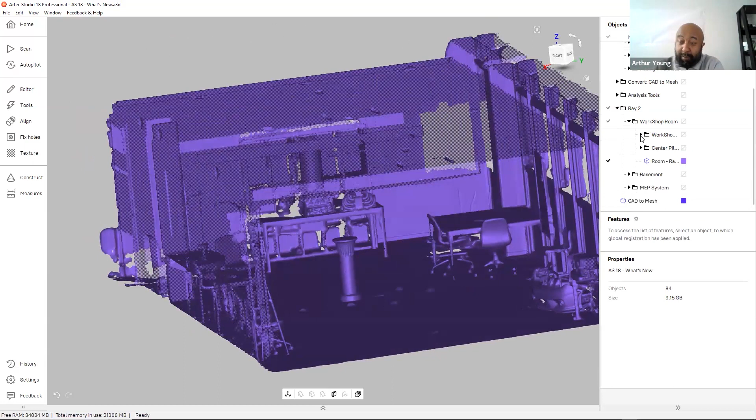Those 3 scans combined - this is still a point cloud data set that was then used to create an actual mesh. This can then be exported out directly as an OBJ or STL file, and used for reverse engineering purposes.

This is an example where we're actually combining Leo data with actual Ray 2 data sets. Here in this aspect we want some higher resolution detail than what's coming from the Ray 2 data.

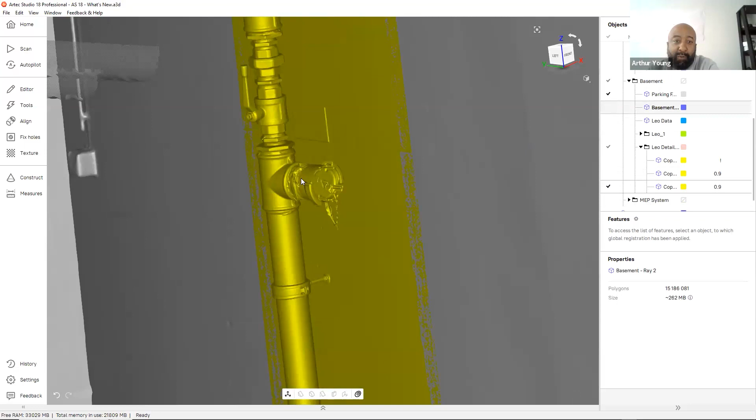If we turn off and show just what's captured from the Ray 2, and then turn on the Leo data set, we can see you're capturing a much higher resolution data set. Because you're always working inside of Artec Studio, you're using both data sets at the same time, so you're getting the best of both worlds, right?

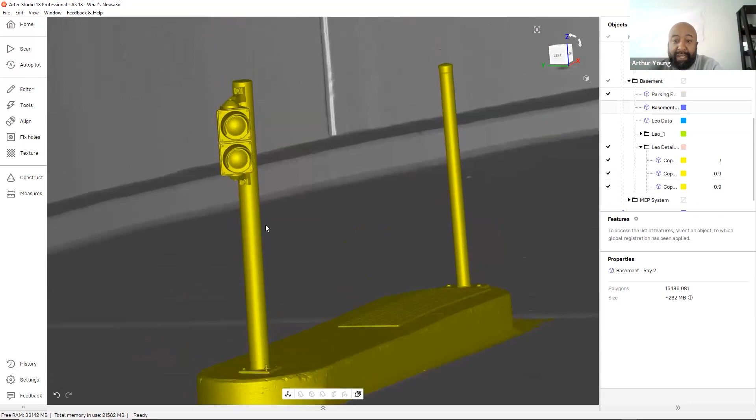So this is just data that was captured here. You can see this is Leo data being merged onto data that was captured from the Ray 2.

Last example I'll show here is scanning a full MEP system. With this plant, if you had to try to scan it with a handheld, you'd be there for quite some time. On the quickest setting, the Ray 2 scans anywhere from 30 seconds to 2.5 minutes to create this point cloud data set, which is then imported in and created as an actual mesh.